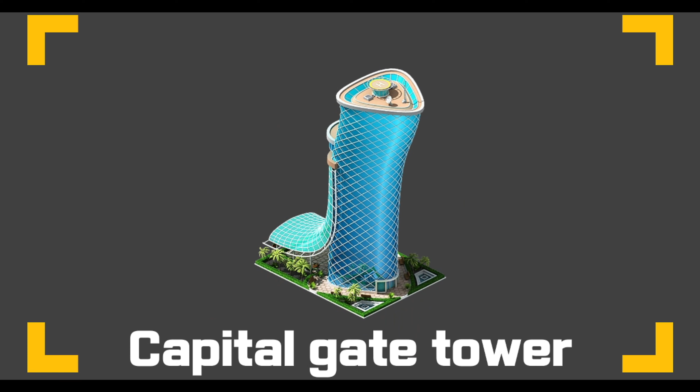This Capital Gate Tower, inclined to one side, twists as it goes up, giving it an appearance slightly off from the original skyscraper. Then how and why did this uniquely shaped tower get constructed? And why was it specifically built in Abu Dhabi?

To understand the reason, we need to first know about the historical background of Abu Dhabi and the culture of the Sultan. UAE, which has the 6th largest oil reserves in the world, consists of 7 independent city-states. In these 7 states, the larger the area, the more oil was reserved, meaning stronger economic power. Among these, Abu Dhabi was the largest of the states, so also the richest. However, Dubai, which was 1/15 the area of Abu Dhabi, was known to be more technologically advanced, which made Abu Dhabi feel a strong sense of rivalry, and there was natural tension between the two.

Starting from the early 2000s, Dubai began to construct high and massive architectures like Burj Khalifa and Burj Al Arab. Sheikh Sultan from Abu Dhabi, who was very rich, had studied architecture in his old days and naturally had interest in the architecture industry. Watching the high landmarks of Dubai getting constructed, he had a desire to construct such a landmark in Abu Dhabi too. Having a strong sense of rivalry, he wanted more than just a high and massive building. He wanted something that could be told architecturally impossible.

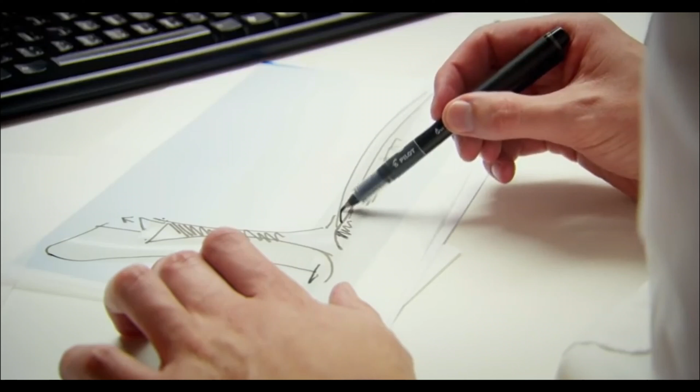Receiving this request, it was now the designer's job to come up with an extraordinary design that would satisfy the Sultan. The surrounding scenery helped them with their job. The designers got inspired by the beautiful seaside and dunes of Abu Dhabi. Getting ideas from the two elements, the rolling waves and the sand's spiraled shape, they wanted to design a building with a tilted and twisted shape that would go well with the beautiful scenery of Abu Dhabi.

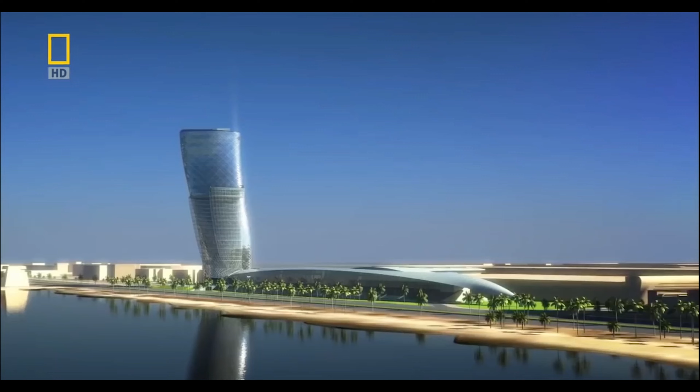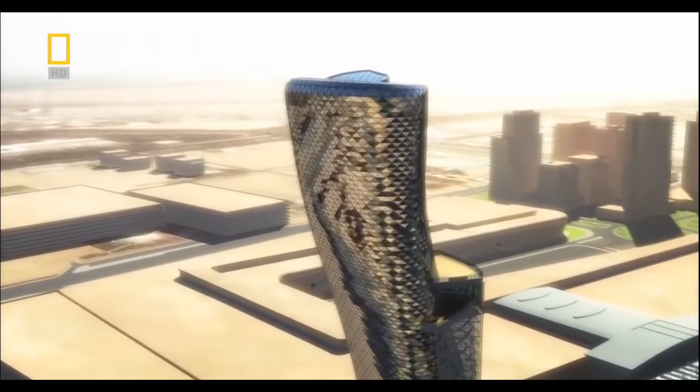Also, the curved canopy, known as the splash, creates a wave-like effect given the building is close to the water, with Abu Dhabi's heritage being near the sea. With the lean, twist, and the splash, the designers had designed this curvaceous shape of the Capital Gate Tower, and this would be able to be perfectly connected physically and visually with its site. However, this complicated piece of design needed many special measures taken to sustain itself.

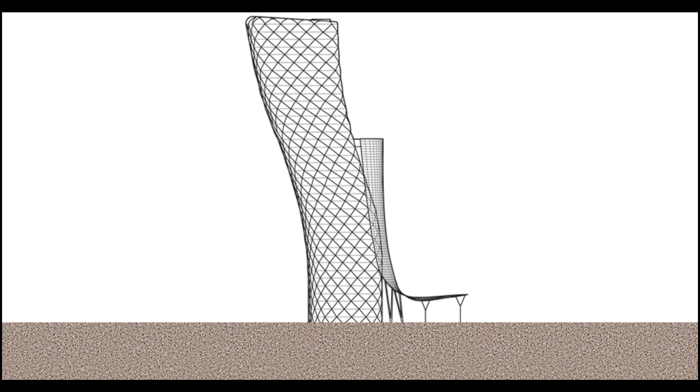The structural engineers had to think of a way to prevent the leaning building from toppling over. They came up with 2 important installations. First, to realize the leaning shape, the designers devised a method to install biased slabs, making longer spans while going up. But engineers knew if they installed the slabs like that, a vertical core would not be able to sustain the overhang and moment, as well as its vertical loads.

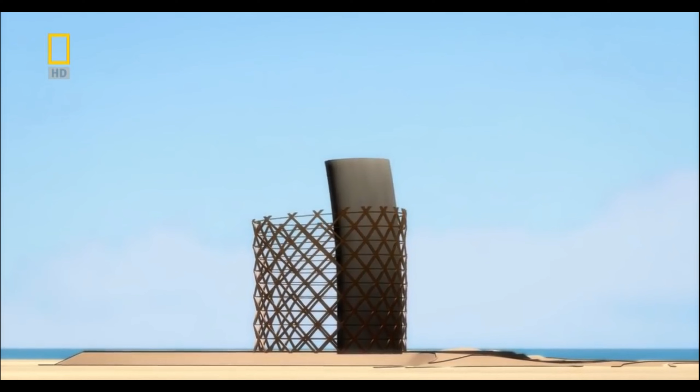So the engineers decided to make a new core named the pre-cambered core, which was bent in the opposite direction of the leaning part. As constructors added the slabs to the upper levels, the weight of the leaning parts would pull the core back into a vertically straight state. The whole core would be in tension, and that would give it immense strength.

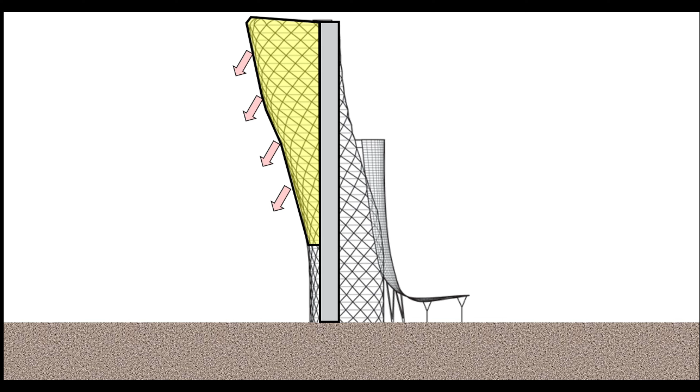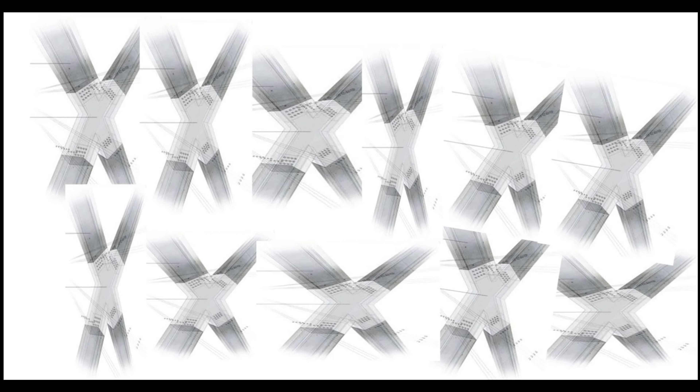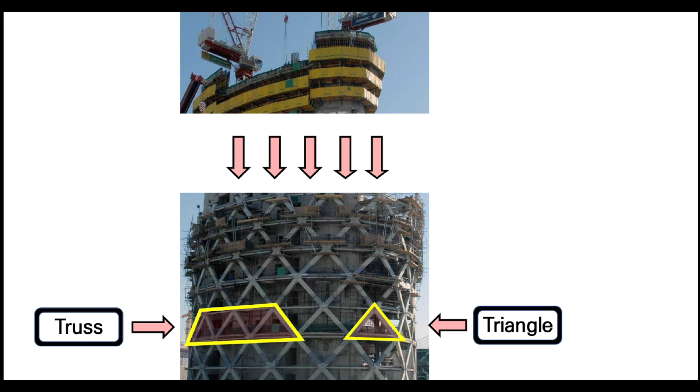Secondly, they wanted another method to resist the lean's load without spoiling the beauty of the tower. Inspired by the thin layers of eggshells, the structural engineers decided to use a diagrid acting as a uniform net that evenly distributed forces. Based on the truss structure, the triangular unit can not only resist vertical loads like the core, but also transfers the subjected lateral load to the member below.

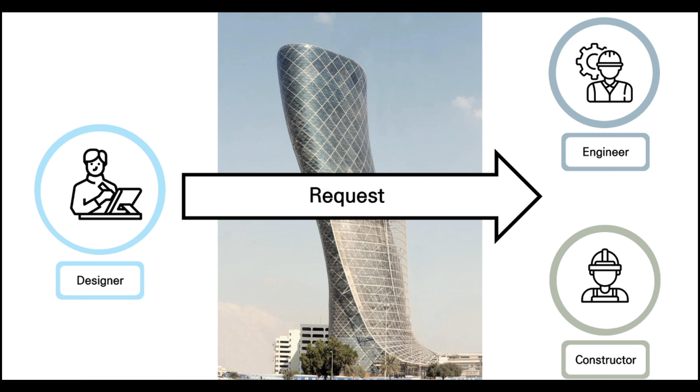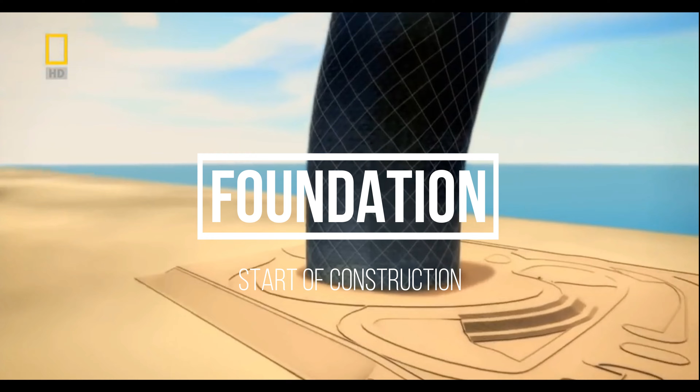Now it was the constructor's job to realize the designer's request and the structural engineer's theoretical solution, and make this impossible building come true. In the realizing step, before constructing the pre-cambered core and diagrid, constructors had to make a unique foundation that could resist load not evenly distributed on the ground, and the overhang caused by its leaning design. Also, Capital Gate Tower's site, close to the shore, had a weak foundation, so it was necessary to use a pile foundation.

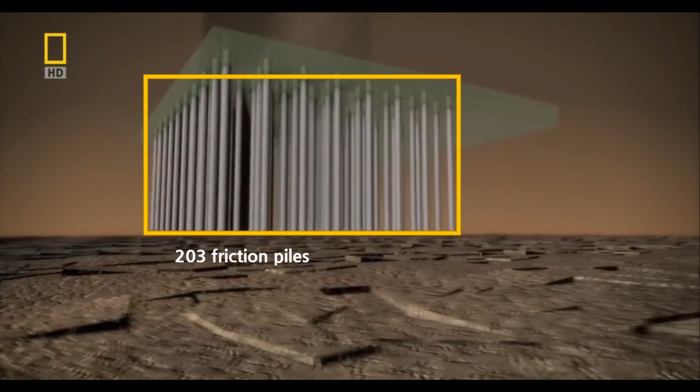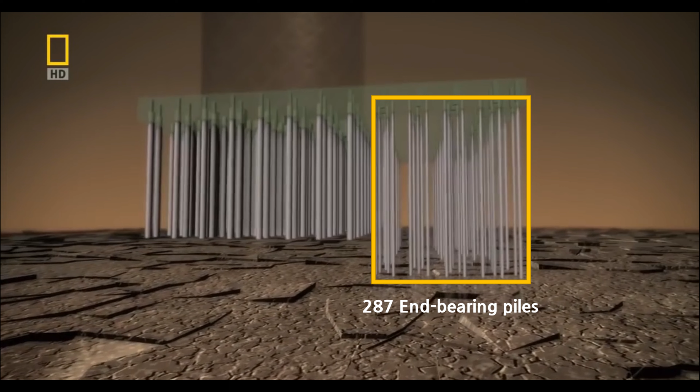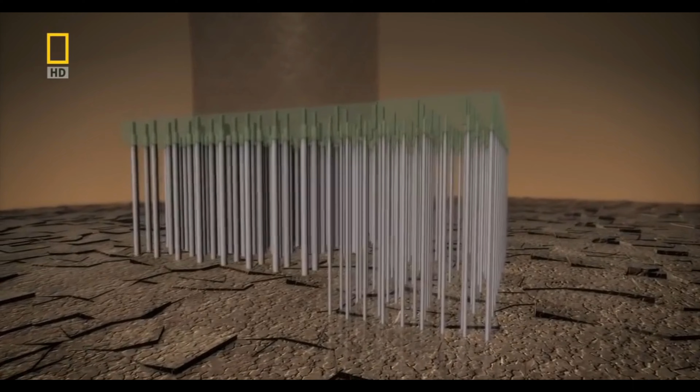They used 203 friction piles on the front side, where the weight is going down into the ground due to the inclination, and 287 end-bearing piles running to a depth of 30 meters to the bedrock, anchored tightly to the soil. Thanks to this foundation process, Capital Gate Tower was one step closer to resisting the massive amount of overhang made by the leaning design.

Now the foundation is complete. To realize the lean and twisting form, other groundbreaking construction methods had to be used, which led to a harder process for constructors.

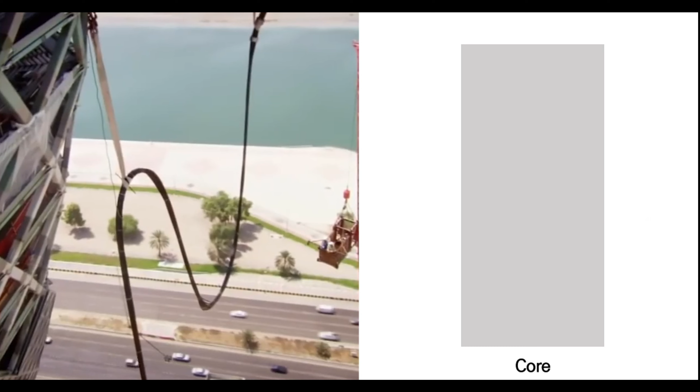On the construction site, to make the pre-cambered core, they had to prevent cracks generating due to the overhang. So the constructors installed pre-stressed tendons to the core, which would counteract the pulling force created by the massive overhang, stopping the concrete from tearing apart.

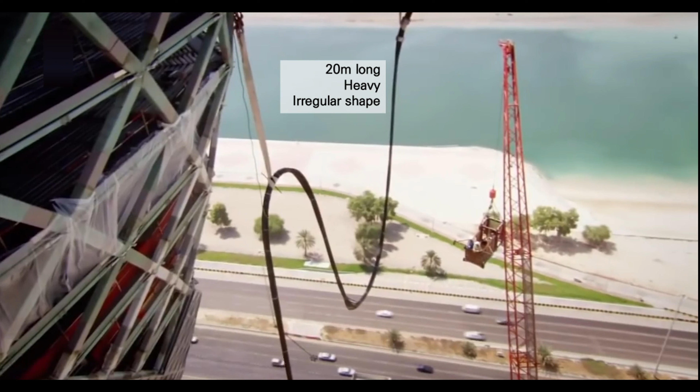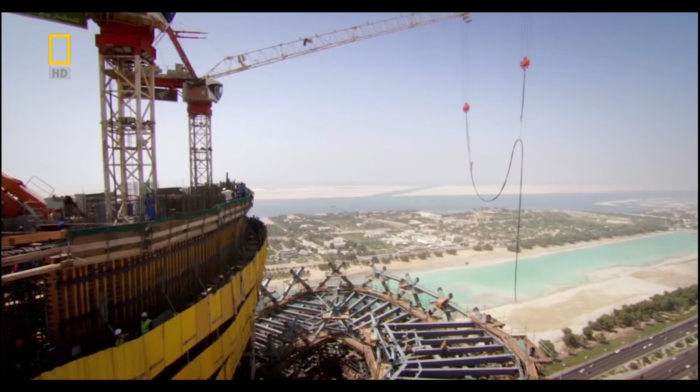As the tendons were 20 meters long, heavy, and bent irregularly, it was impossible to pick up the end point of the tendon and place the opposite point exactly to the duct with handwork. That is why in this process, it was necessary to bring in the crane to the construction site.

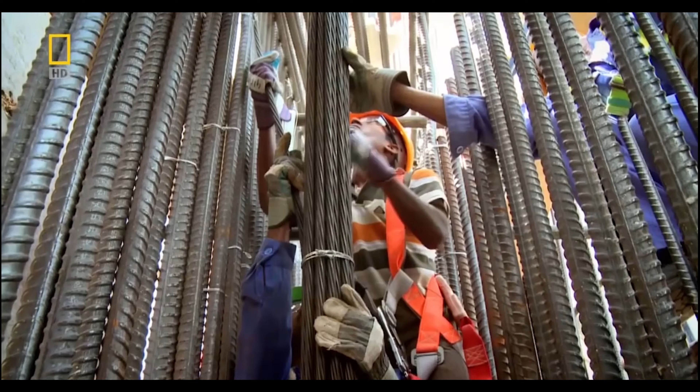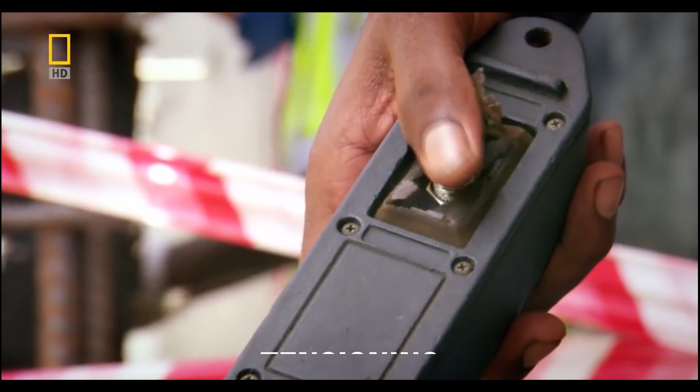The team used the steel tendon's weight to force it through a duct already cast through the core. Once the tendon got in position, the team would lock off both ends, ready to tension its individual strands once again. This method had not been used before, but it was very effective in increasing the strength of the core.

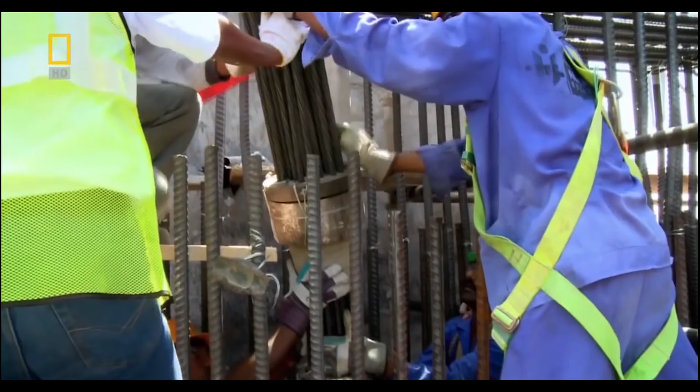They made 4 meters of core in a week and repeated the same work. But this repetitive method wasn't used for the whole units of the core at once. Among the ways to complete a fixed quantity in a timely manner, there may be a method of adding more manpower or extending the work time. But this wouldn't be the optimal solution.

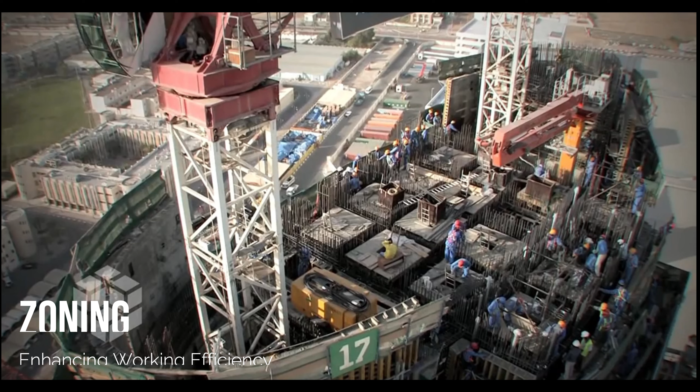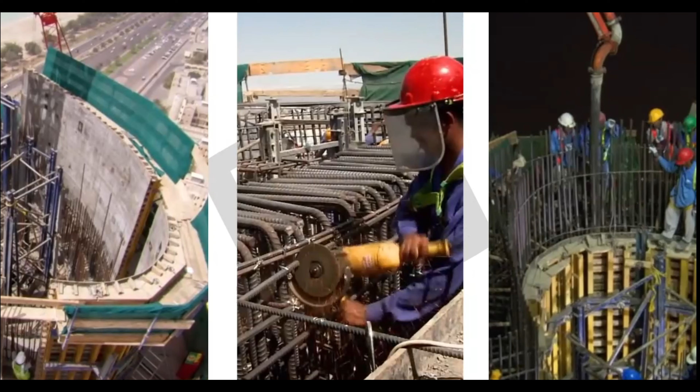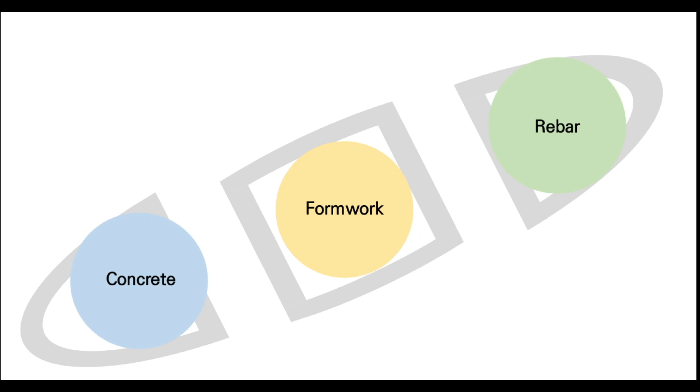The engineers divided the core into 3 sections. The workers of form work, rebar work, and concrete pouring work would not interfere with each other. As a result, the process is constantly circulating and can proceed at the same time, so even a small number of workers could perform fast construction.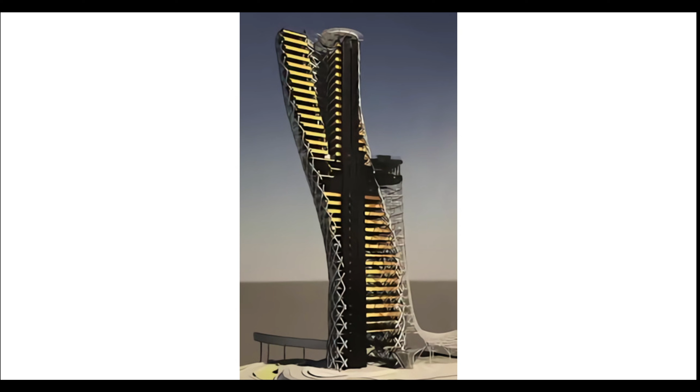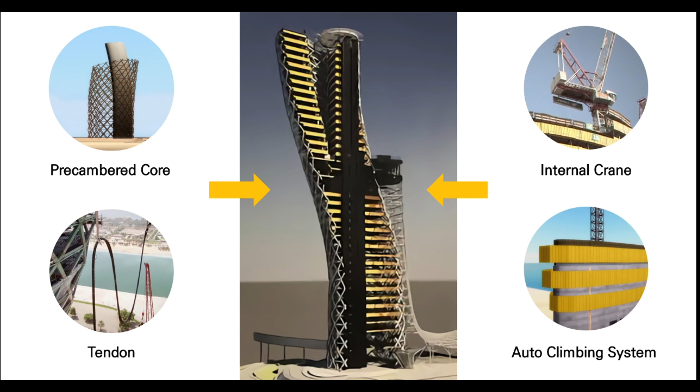Eventually, Capital Gate Tower's core could be realized with a new technology named pre-cambered core and post-tension tendons, also appropriate usage of existing methods like internal crane and auto climbing system.

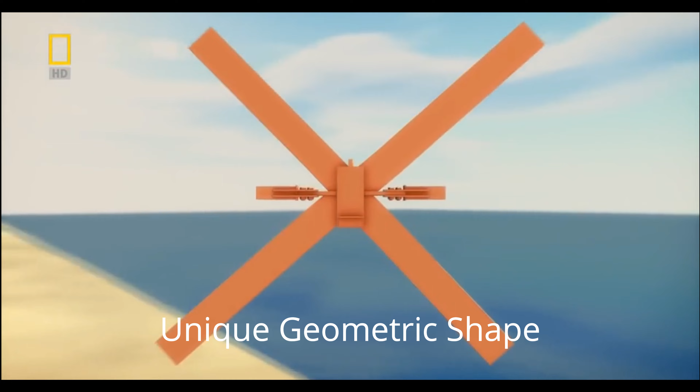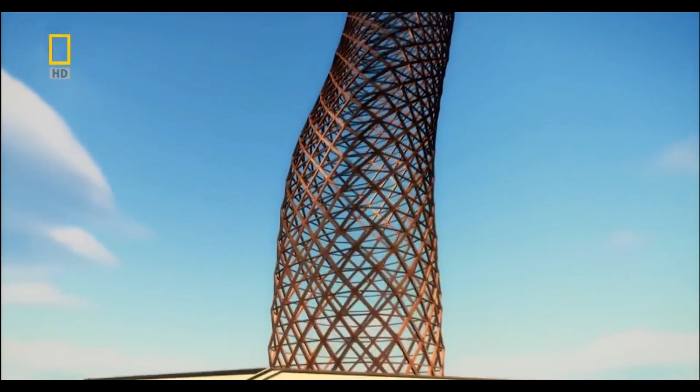Now, to realize the twist of Capital Gate Tower, unlike the normal uniform diagrid, it was indispensable to use all different diagrids with its unique geometric shape. Besides, it would be extremely difficult to connect these unique shapes into one whole mesh. If the diagrid is not assembled with millimeter accuracy, the mesh will be unable to channel the loads, and the structure would become meaningless.

With BIM and Tekla 3D model, they precisely predicted each unique cruciform's detailed length, curvature, and different form of nodes to connect them. With these, they were able to make each of the 720 designed cruciforms, none of them the same.

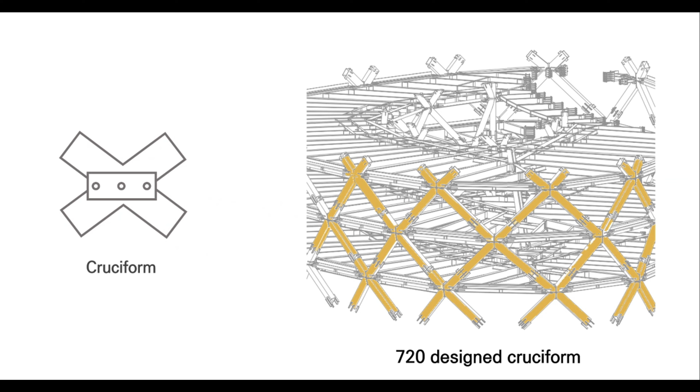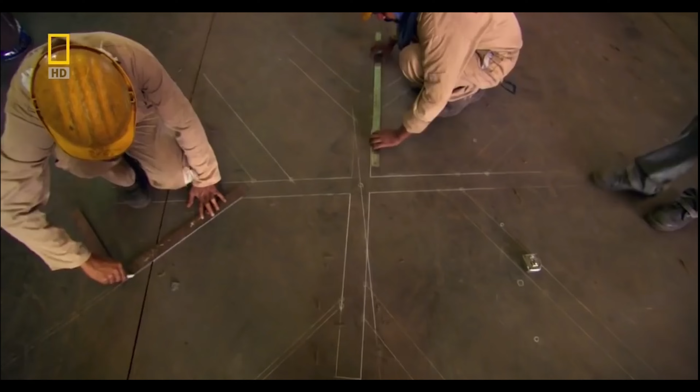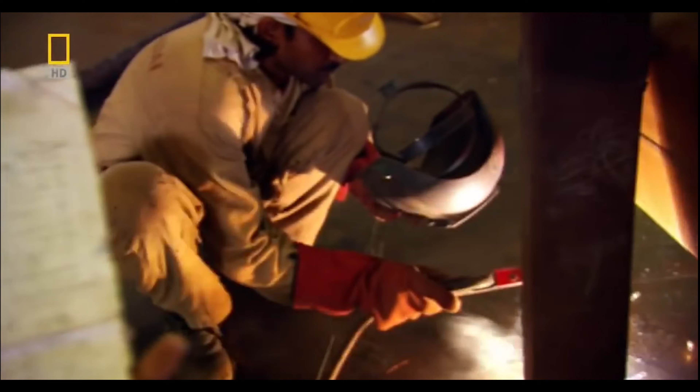The engineers used an old-school method, chalk, to mark and calculate exact angles. It might look unsophisticated that they drew plans on the ground with rulers and protractors, but it was highly accurate, ensuring all the members. After that, they could cut and connect each member according to the chalk line drawn by the constructors at specific angles with high accuracy.

What was left for them was to accurately assemble the unique forms to create a uniform net for the load. When they started to assemble those, a three-dimensional GPS system was used.

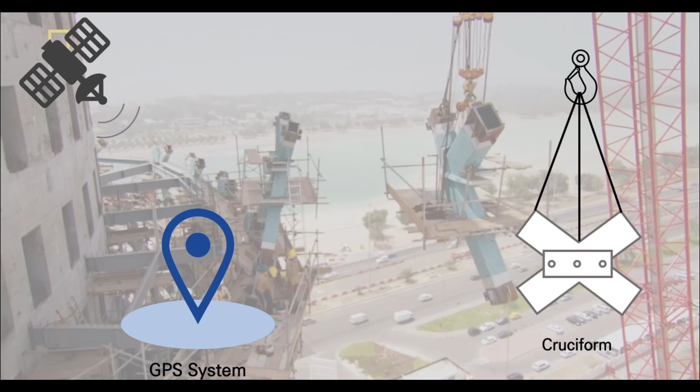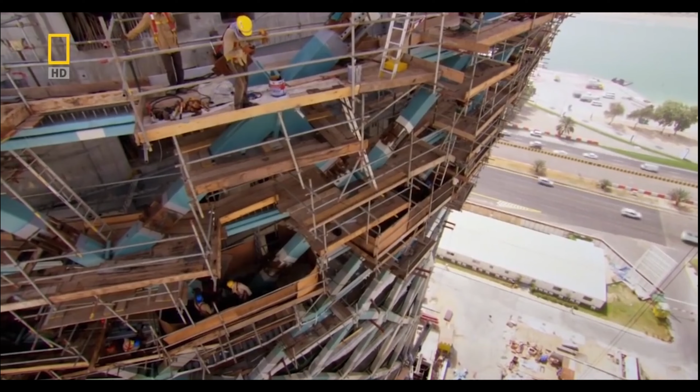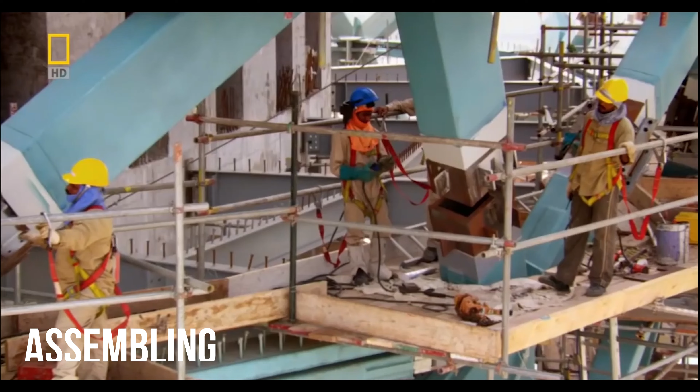The global 3D coordinates taken from the Tekla model were utilized for erecting the diagrid assemblies at their exact position. When each cruciform was lifted to the precise position, a team of 240 steel fabricators matched the opposite side of the endpoint on hand and assembled the diagrid with nodes and welded all three together. By this, the constructors could proceed the task accurately.

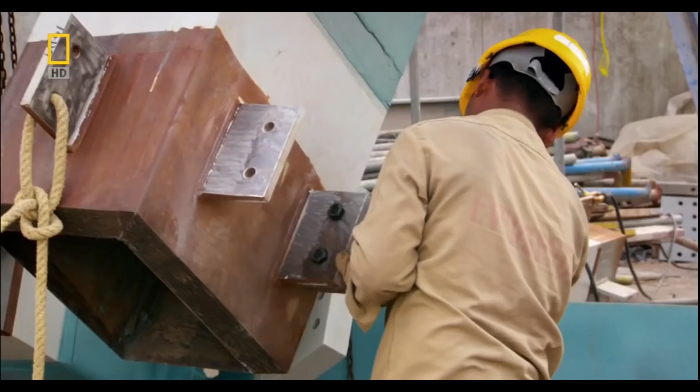The diagrid was finished. What was left for them was to assemble them with glass claddings and finish the facade.

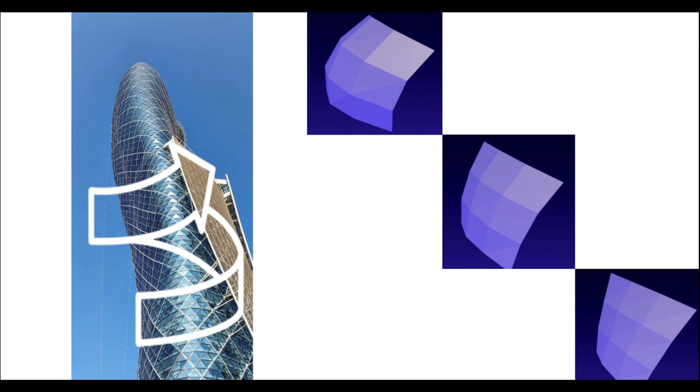To realize the twisted form, they had to attach all the different shaped diamond units. In the process, they needed millimeter accuracy, but there was a different problem from the diagrid. As mentioned before, the pre-cambered core straightens as it grows, so it means the skyscraper will not stop moving until after completion.

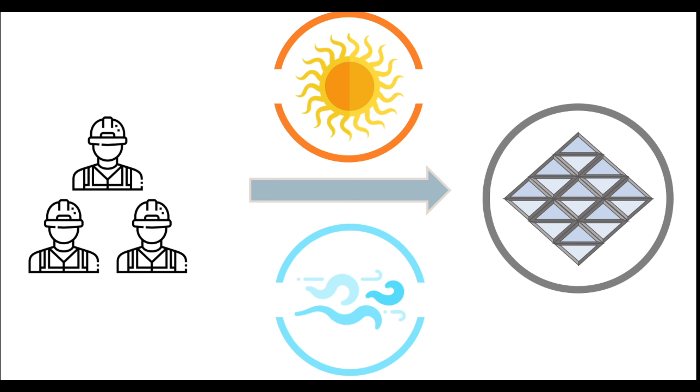More than that, with the harsh climate conditions of Abu Dhabi, the facade had to accommodate additional movement due to heat expansion and strong wind. Keeping these in consideration, the construction team had to find reasonable solutions to realize this complex facade with glass panels.

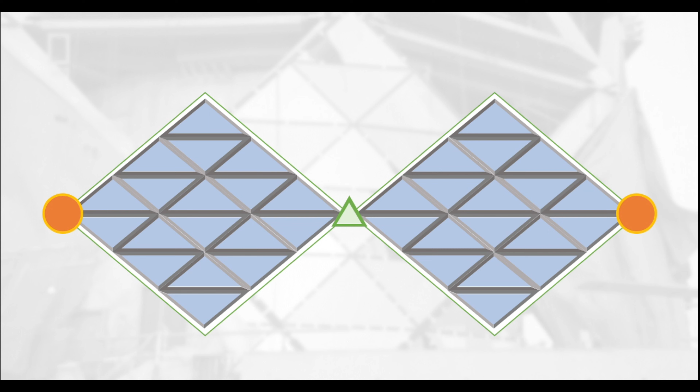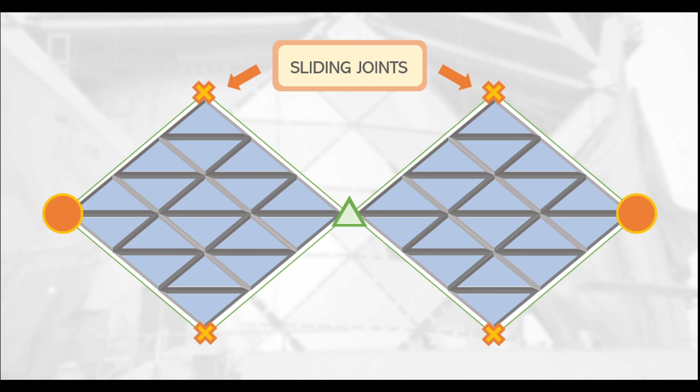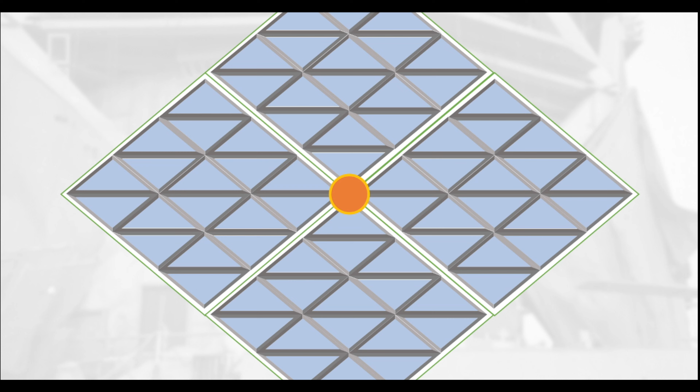Capital Gate's each large panel was fixed in just 2 places at each side. A special sliding joint was developed to locate at the top and bottom of each panel, allowing room for additional vertical building movement. As the diamonds were stacked over one another starting from the bottom, the remaining unfixed 2 points would be fixed by attaching the next diamond, and this process would repeat. By this, it would give room for extra movement during construction before all points would be totally fixed.

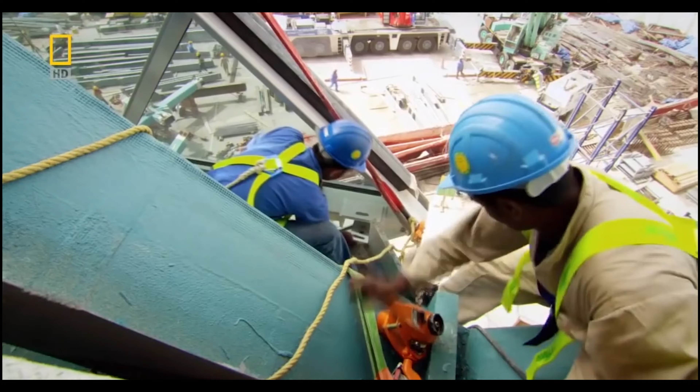They also used a special system in connecting the diamonds. Diamonds connect to each other with a 2-layer bespoke seal. A flexible spongy seal allows the facilitation of movement. With this, the pre-cambered core and diagrid were able to successfully realize the leaning, twisted form of Capital Gate Tower.

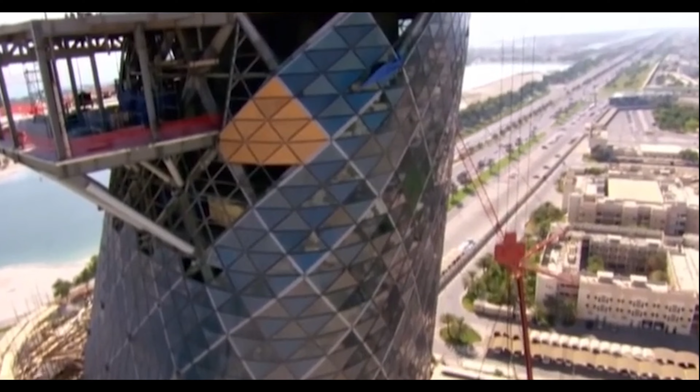Finally, they had realized the leaning appearance. But this was not enough to satisfy Sheikh Sultan's request to make Capital Gate Tower an iconic building. The designers came up with a new demand for additional structures, pushing the design to the extreme. They wanted to build an infinity pool and a restaurant hanging 100 meters above the ground, without any visible support.

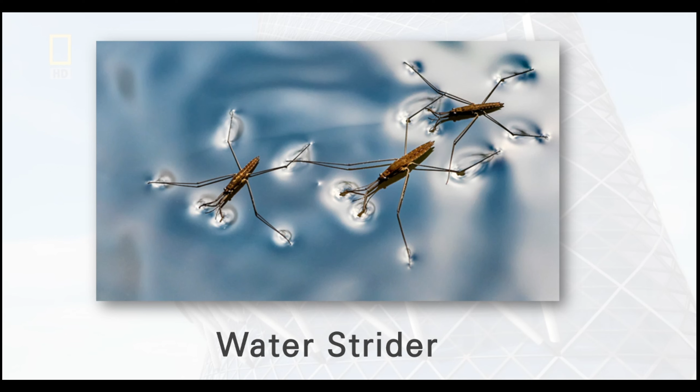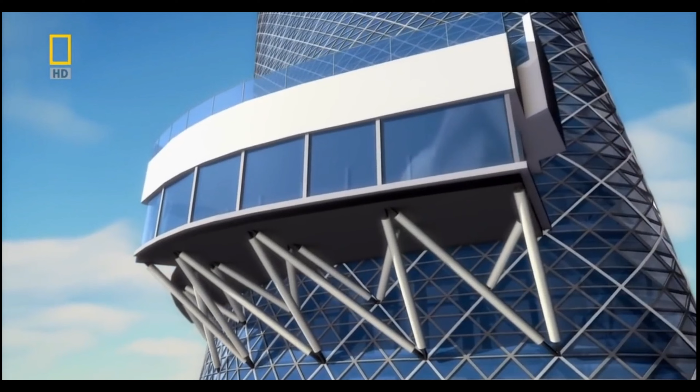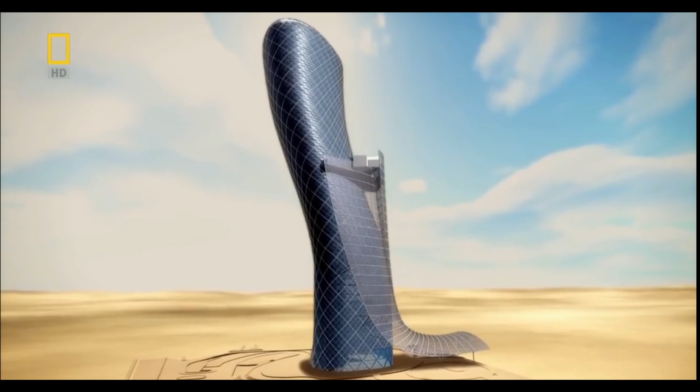To accomplish this, the structural engineers brought on hidden structures and the principle of insects that can walk on water. However, it was still impossible to keep the additional structures that sustain this massive and heavy cantilever completely hidden. The designers came up with a great solution, one of the most noticeable design features of Capital Gate Tower: the splash. It's a layer of woven metallic mesh stretched over a metal frame, stretching as an extension of the cantilever. This is not only an excellent design element, but it would also shade the tower from the hot sun.

However, installing this additional structure would give immense load to the already massive weight. It was necessary to put it at an optimal place. When the engineers who managed the load of the building received the demand of the cantilever, they had to suggest an idea to solve the already existing massive overhang and also stabilize the extra structure.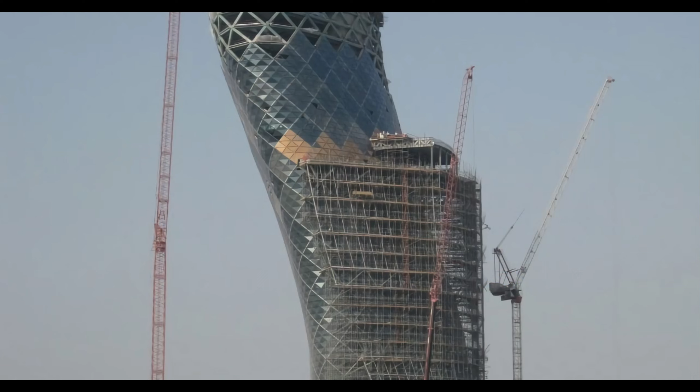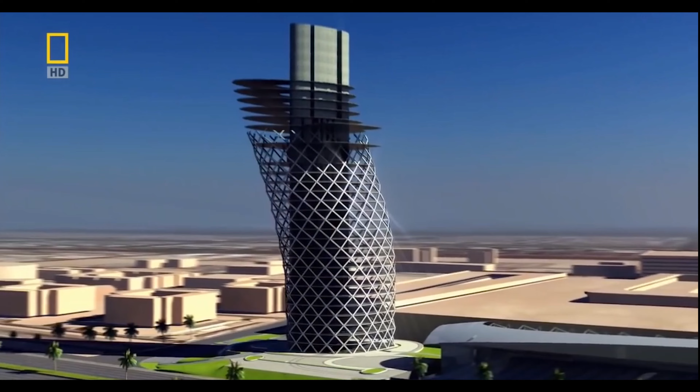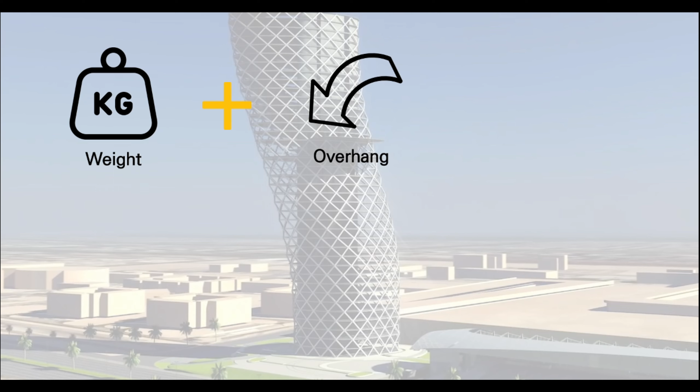The engineers suggested counteracting by installing a cantilever on the opposite side of the lean to reduce the immense overhang. But even with the cantilever, it was not enough to reduce the overhang. In the upper part, they had to find a solution to sustain the building's increasing floor weight and overhang due to the lean. Engineers and designers consulted and decided to diet the leaning upper load that caused the overhang fundamentally.

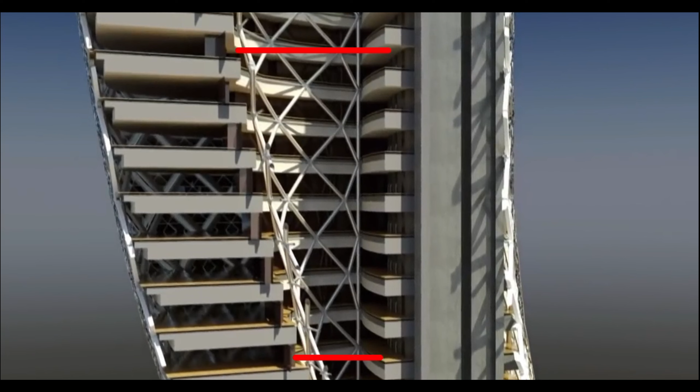This was when the architects came up with a clever solution: bringing in an internal atrium inside the upper floors of the building. With the void getting larger as it goes up, it has the shape of a funnel. It helped the tower sustain the lean, preventing it from toppling over.

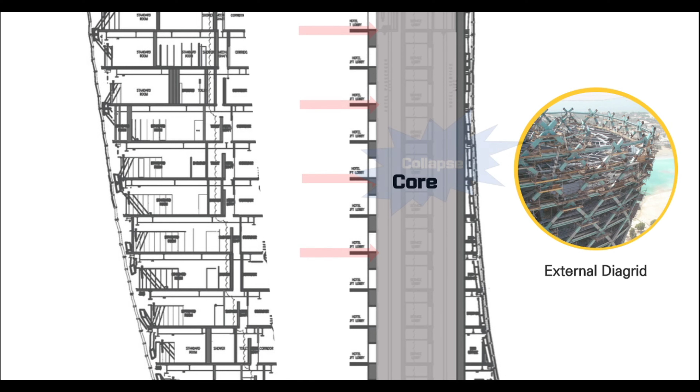However, with this empty space, the upper load of the building would become unpredictable, punching too much pressure to the core, and it might collapse. So they mirrored the external diagrid to make an internal diagrid. With this, it could successfully gather the loads and disperse them back into the adjacent diagrid and the whole part of the building, thereby reducing the burden. The additional structures, requested as a design factor for the iconic building at first, were actually structurally helpful and energy efficient. With these, they had almost finished constructing the iconic building.

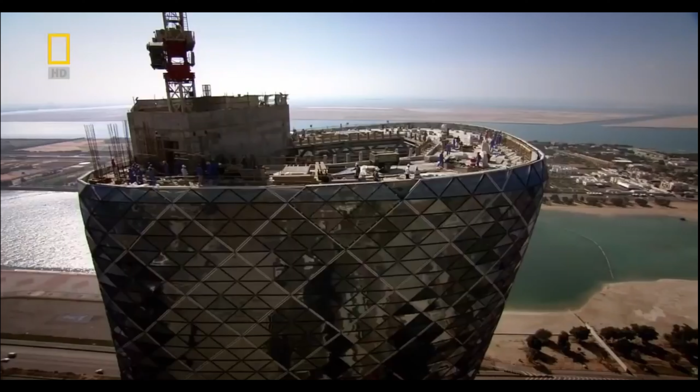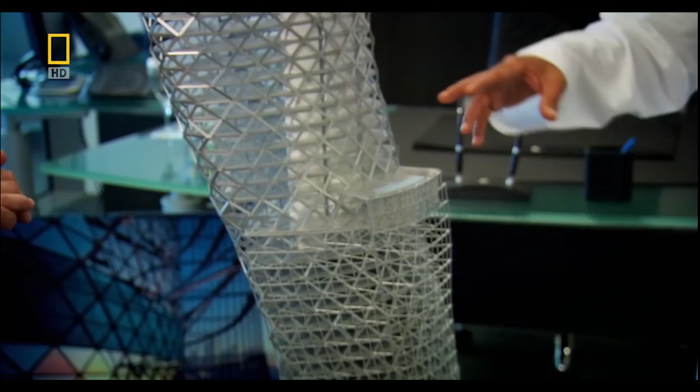With the efforts of engineers and constructors, the additional requests of the designers were almost finished. However, 6 months before completion, when everyone thought the construction was almost done, Sheikh Sultan made an urgent request that a helipad be built on the roof of the building. When the contractors first heard about this, they thought it was just a joke. But when Sheikh Sultan called them directly, the contractors had to think about putting a helipad at the highest point in Abu Dhabi.

This request seemed easy at first, but it posed a serious problem: wind shear tipping the whole helicopter on its side. Wind shear refers to a phenomenon that occurs in the process of filling air in an empty space due to a difference in wind speed. The rapid change of wind speed by wind shear often affects the blades of helicopters about to land and causes accidents.

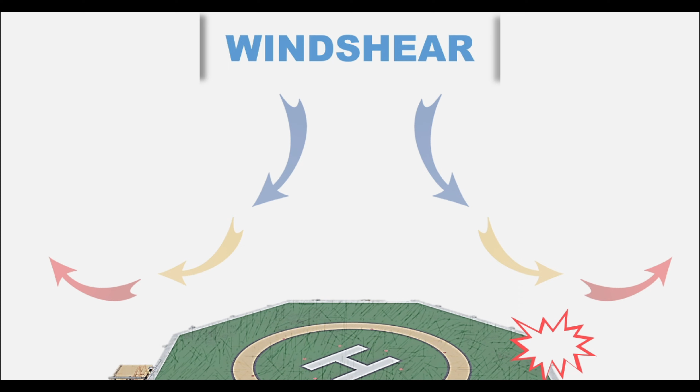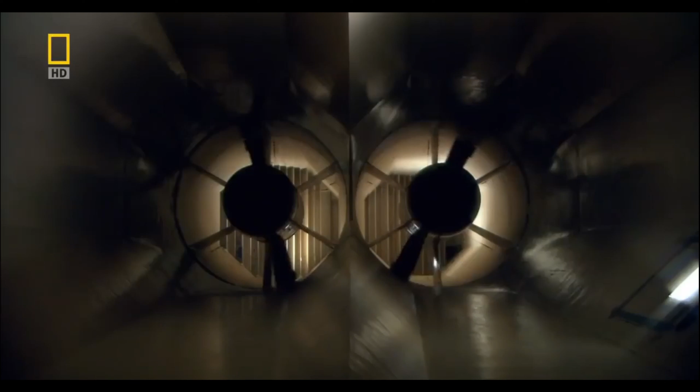So they had to predict and prepare for wind shear that could occur on the roof in a short time. The best way in this situation was to make a model and put it in a wind tunnel. A scaled-down Capital Gate entered a high-tech wind tunnel in London. In this experiment, the contractors got the most undesirable result: the wind shear situation was worse than expected.

Wind shear created an air curtain flow over the top of the building. A spiraling turbulent flow separating the surface was created. This was not the only problem the wind tunnel test showed. The winds affecting the helipad created a large suction force. This force tried to blow the helipad off the roof of the building.

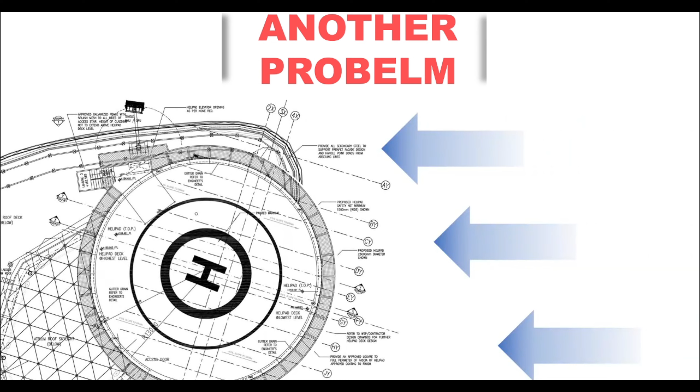In order to make this helipad safe, the builders decided to lower the position of the helipad 2 meters, because the tip of Capital Gate Tower's top leaning side could protect the helipad and the helicopter's course from strong shear wind. Lowering the helipad was not an optimal design. However, after wind tunnel tests were conducted, they found out that they had successfully reduced the wind shear threat.

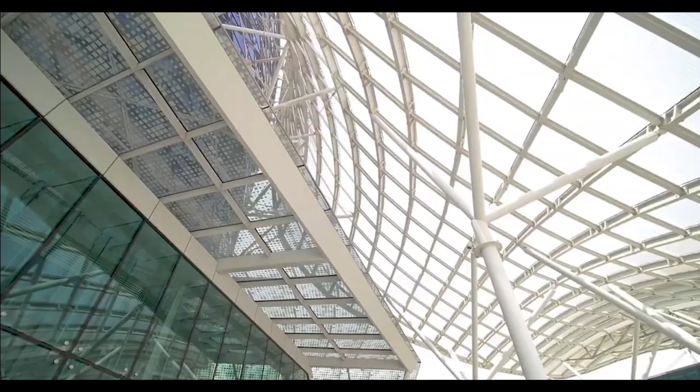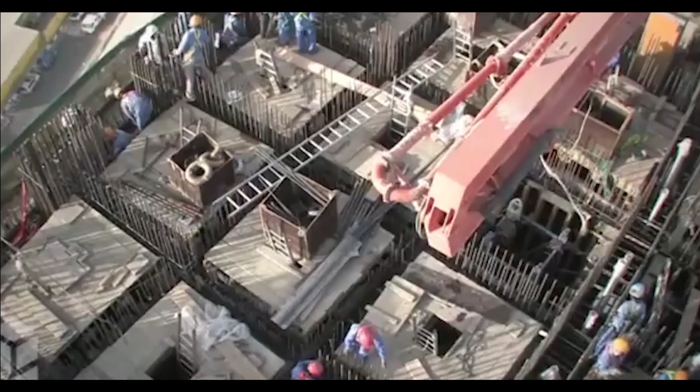This seemingly impossible building that the Sultan wanted was realized with lots of people's efforts: the designer's endless pursuit of a gorgeous building, engineers' massive sense of responsibility for safety, and the constructor's willpower of never giving up on realizing it. Without these three parts working harmoniously together, the drawing's result would not have been able to come to life before our eyes.

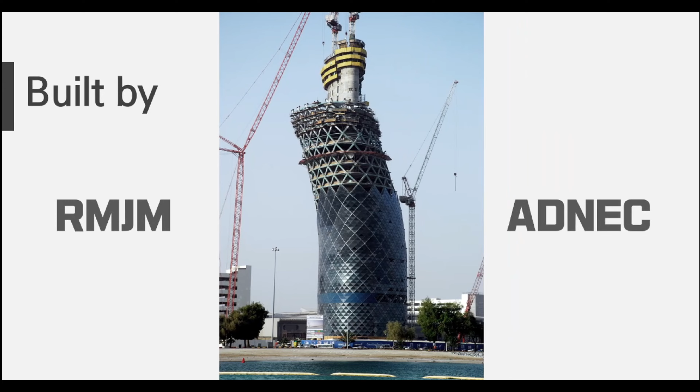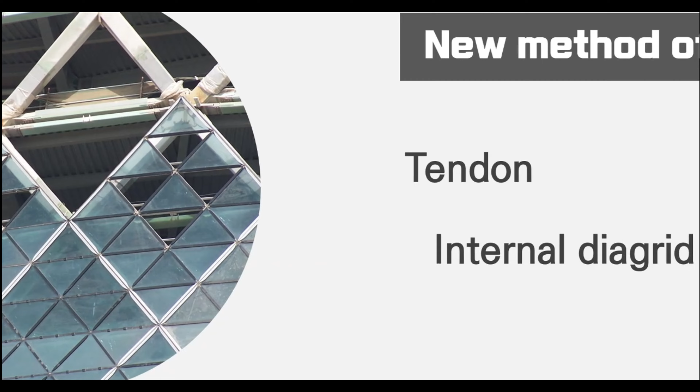Studying this building, we were able to learn the overall construction methods and principles that were difficult even for experienced experts. At the start of this construction engineering class, our first impression of the Capital Gate Tower was that its appearance was simply beautiful. But after 12 weeks of studying, we were able to trace the efforts of constructors and their engineering methods and studies that were reflected in the building. This was a very educational opportunity for us.